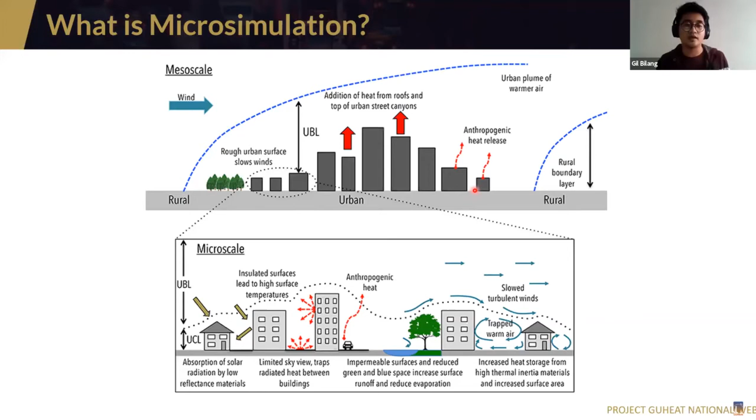Now, how do these urban features affect our urban atmospheres? For example, the materials that we use for our buildings sometimes have low albedo, meaning low reflectance materials. Instead of reflecting solar radiation, they tend to absorb it. We have insulated surfaces that lead to high surface temperatures, or we have limited sky view, which traps heat within buildings. Another is anthropogenic heat sources from our cars, impermeable surfaces from the roads, and also how we place buildings together.

It affects the wind, because wind actually helps in convecting or dispersing warm air, but because of the placement of our buildings or structures, sometimes it causes turbulent winds or it traps warm air. The thing with turbulent wind is that if the area has turbulent wind, it tends to also have a higher air temperature. Now, given this microscale, we try to model all of this together to come up with a near accurate real life scenario.

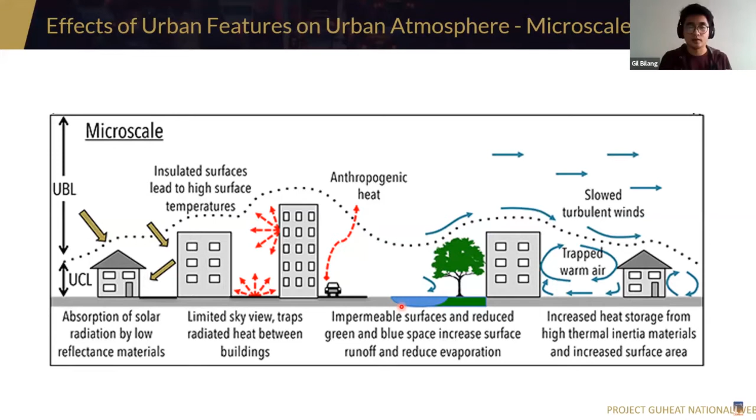So here comes the model that we use, ENVI-met. ENVI-met is a microclimate simulation software which we use to simulate the urban environment. It can also assist environmental planning, like creating new towns or simulating new buildings or new construction materials. It also creates microclimate simulations so that we can plan out resilient cities, in the context of our project, without urban heat islands. The simulation we will be presenting today mostly covers the use of ENVI-met.

Moving forward, here is our simulation scenario with our sites. First is the Davao City Hall complex, wherein we determine whether green roofs cool our air temperature. Second, we analyze the effects in terms of air temperature of proposed scenarios such as the construction of a new condotel or the new skyway in Claveria Street.

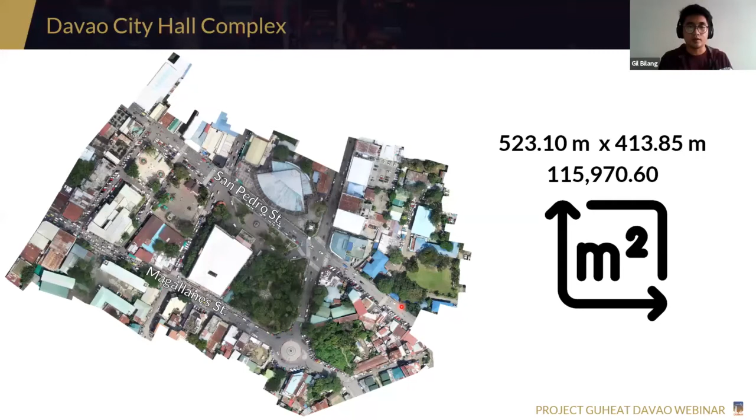So for our first study, this is the Davao City Hall complex. It is around 115,970 square meters, and it has two main thoroughfares, San Pedro Street and Magallanes Street. For those not familiar with this setup, these are the landmarks that we have: the City Hall, Sangguniang Panlungsod, the Cathedral, the Rotunda, and such. This is the real photo, and this is the ENVI-met model, how we modeled it.

Now, what are the scenarios that we have? We have the current scenario, followed by scenario 2, which is the current plus green roofs. The third is we add buildings on the areas where there are spaces. And the last is the buildings from scenario 3 with green roofs.

Now you may be asking, how do we qualify the green roof part? We conducted a survey, and our criteria for placing the green roofs are: first, it should be concrete; second, it should be a flat surface instead of slanted; and third, those two qualifications. So this is the spatial distribution of our air temperature.

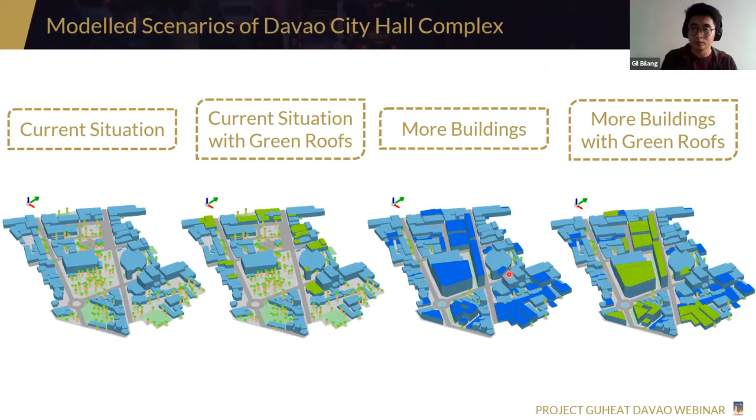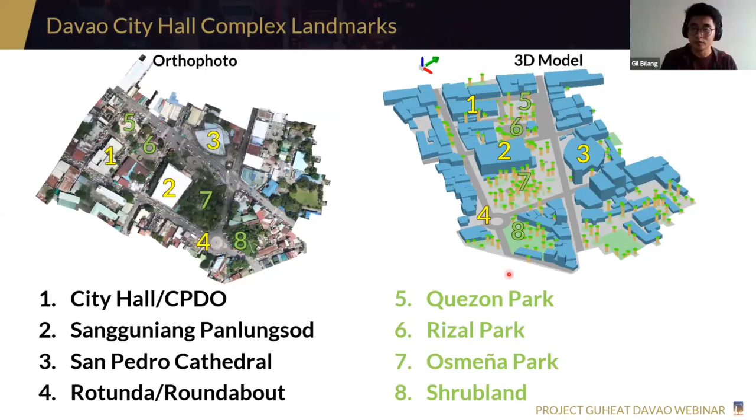We chose 9 a.m. in the morning, 1 p.m. after noon, and mid-afternoon. This figure shows an air temperature simulation taken at 2 meters, and generally the air temperature ranges from 20 to 41 degrees Celsius. As you can see, the hottest part is around 1 p.m. Now we will look at it scenario by scenario, comparing with the current scenario.

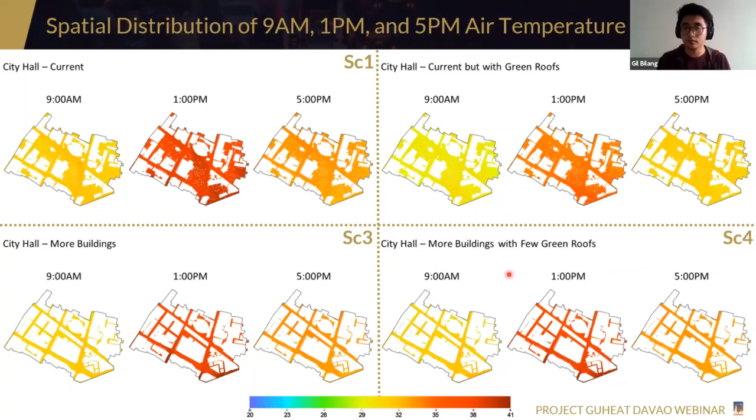This is scenario 1 and scenario 2. We notice a higher temperature for both scenarios at 1 p.m. But in comparison to scenario 1, the air temperature for scenario 2, with green roofs, is lower at 1 p.m. What this tells us is that the placement of green roofs contributes to lowering air temperature. The lowering of air temperature is seen at 9 a.m., 1 p.m. and 5 p.m.

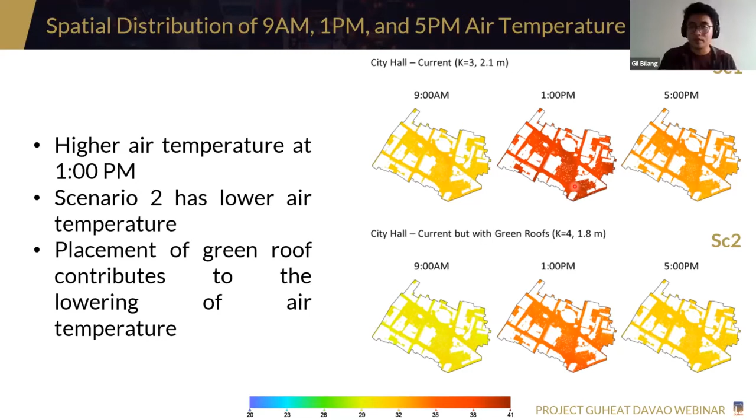In scenario 3, where we place more buildings in areas that were previously open space in scenario 1, we see a similarity of temperature, evidently on the streets. The air temperature colors are almost the same when we place more buildings in the area. Whereas, what if we put green roofs on top of the buildings we placed in scenario 3?

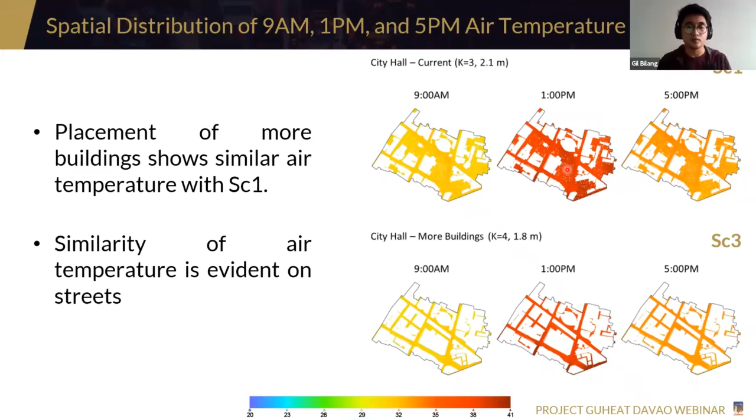We observe a slight reduction, which means that even if you put green roofs with more buildings, the air temperature is only slightly lower than scenario 1. Which means that in terms of mitigating strategies, placing more buildings contributes to warming the air temperature at near surface level, even if we put green roofs.

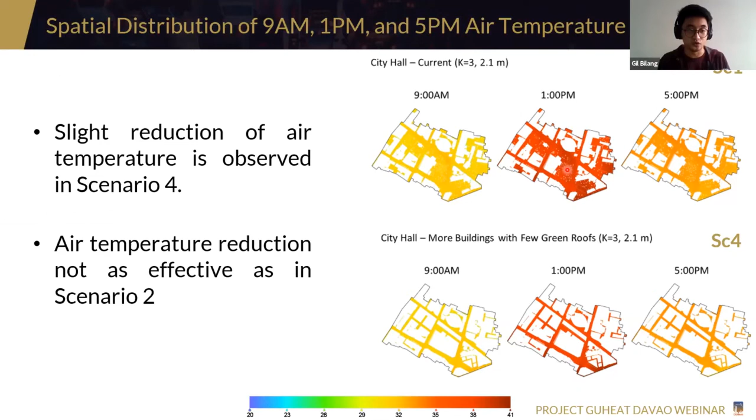Now this is a figure of the evolution of hotspots, and we focus on around 1 p.m. because this is the time when the hotspots are largest in terms of area. Looking at these hotspots, we see them developing in certain places, but with some similarity. So we will try to look at them one by one.

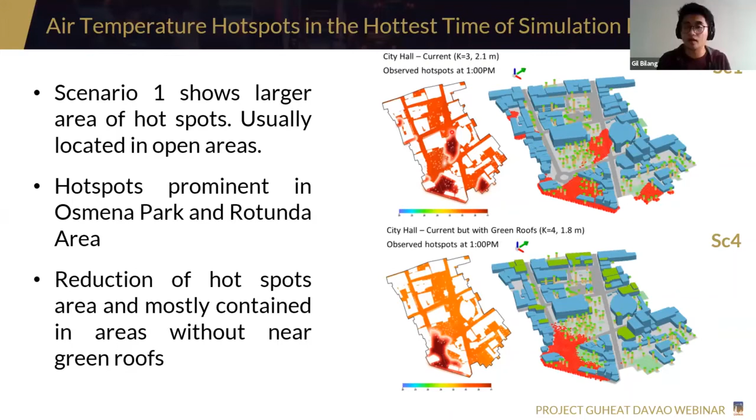Going back now, this is the evolution of the hotspot air temperature at the hottest time, around 1 p.m. As you can see, we have the current scenario, the current with green roofs, more buildings in scenario 3, and more buildings with green roofs. Again, we see a reduction of our hotspots from scenario to scenario. The difference is that for scenario 2, the reduction is because of the addition of green roofs, while in scenario 3, the reduction is because we placed buildings.

Now, it's kind of impossible for the hotspot area to occupy the same area as in the current situation because buildings are already placed. But one thing that is similar is that we still see the same hotspots in the Rotunda area. And when we go to scenario 4, with more buildings but few green roofs, we still observe the same hotspot areas.

Now, you might be thinking, what's the difference between scenarios 3 and 4 in comparison to scenario 1? Looking at the color gradient on the left side of the figures, compared to scenario 1, the air temperature on the streets is a little bit cooler. But we can see a more evident cooler air temperature for scenario 2 in comparison to scenario 1. Next slide, please.

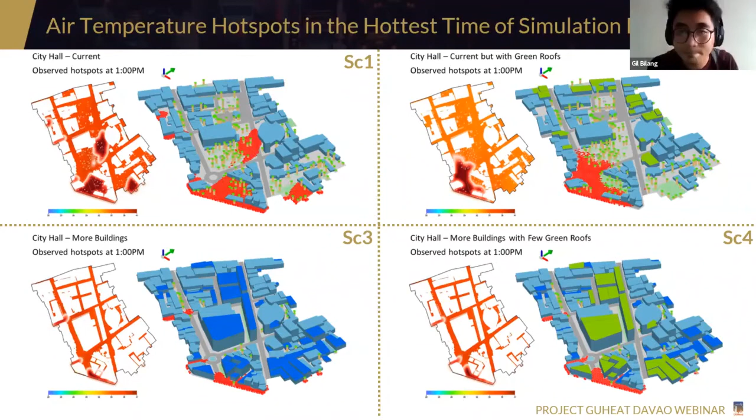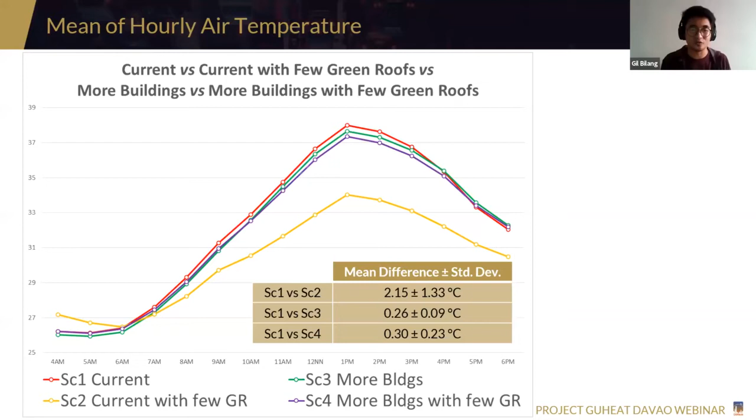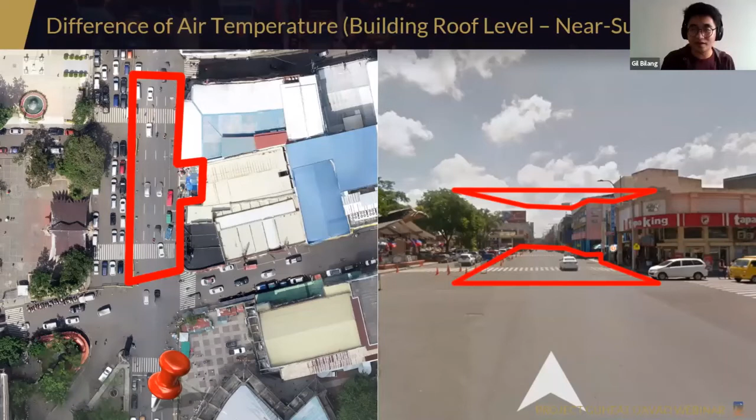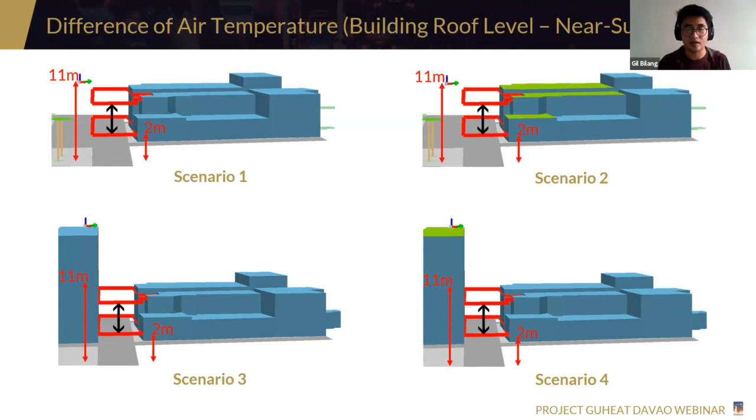So in this study, we try to determine the impact of vegetation and also the building shading. So as you can see here, we take temperature at 2 meters and at 11 meters. All right, moving, please, next slide.

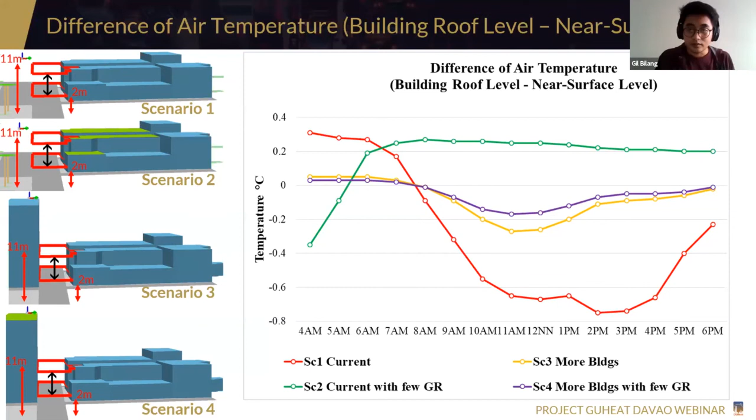Now, what does this actually imply? This implies that it's true that there is a lowering of air temperature in near surface level when we place green roofs at building roof level, but the catch here is it depends actually on the height. The taller your building is, or if you have a skyrise building, even if you place green roofs on top of it, konti lang yung kanyang epekto pagdating sa 2 meters level in comparison to buildings that are, let's say, 1-story or 2-story. So again, this is not a generalization, but this is what we found out sa study na to, and this can still be replicated. All right, next. I'll proceed further.

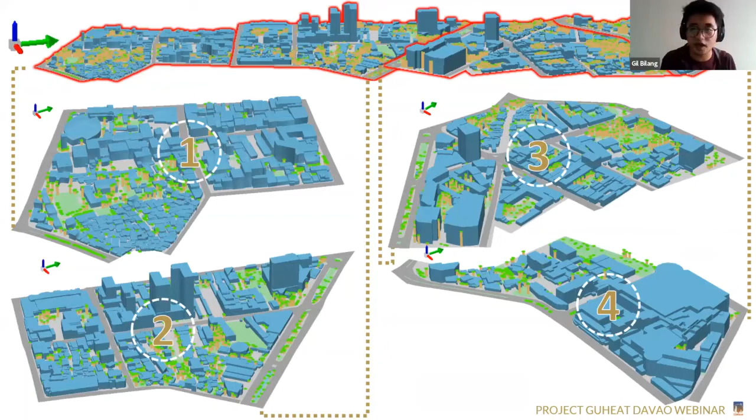Okay, so the next scenario we have is in Claveria Street or the CM Recto. It's around 631,308.55 square meters. And this is actually a thoroughfare that experiences heavy traffic due to private and public utility vehicles. There are few trees but with partially covered walkway. So in this area, kasi sa ENVI-met, to simulate this big area would be computationally heavy. So that's why we divided it into sub areas. So we have sub area 1, 2, 3, and 4 as seen in this figure.

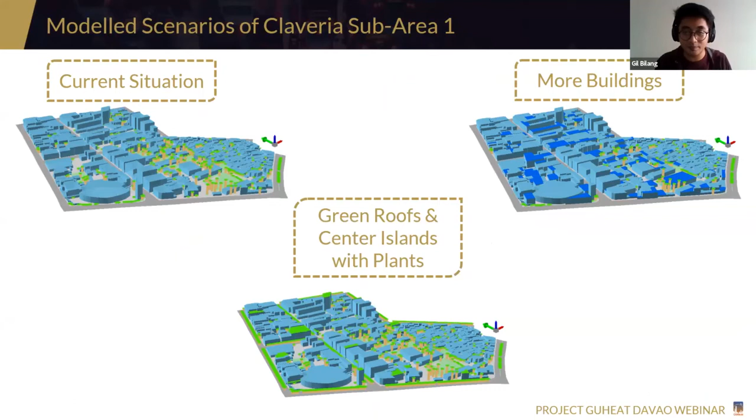Moving forward. All right, so next slide, please. So these are the model scenarios for the entire sub-area. So we have 3 scenarios. First is the current situation. Second is more buildings. We place the buildings in areas that are still open. And the next is we randomly place green roofs in the sub-area, and we also place a center island. We place plants in the center island. So this is reflected in all sub-areas. So I'll make this faster. Okay, sige, please move forward. Next slide, please. All right, sige pa.

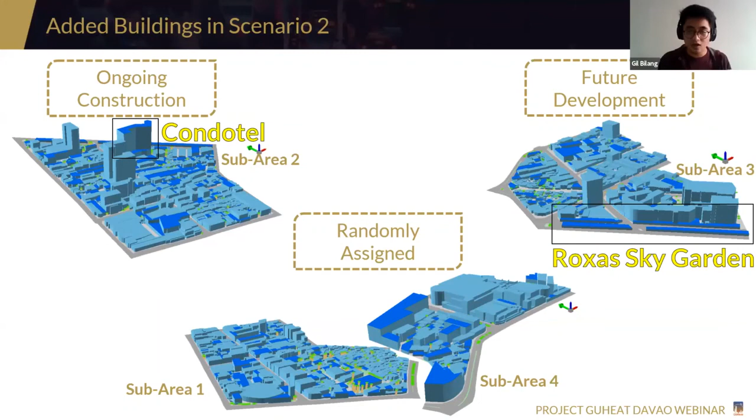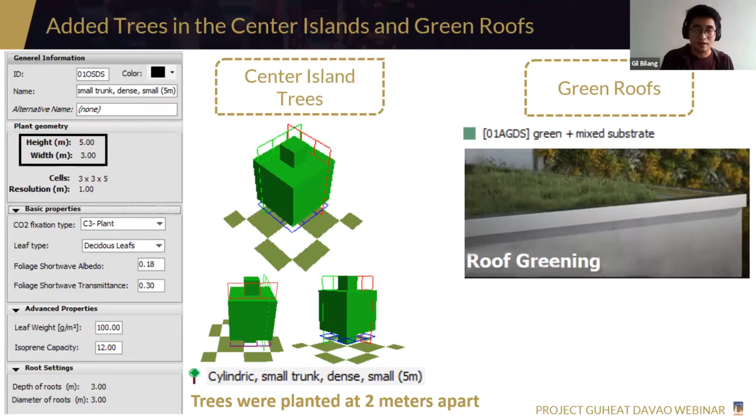All right, so dito na. So in this case, there are some ongoing construction or future developments according to the local government of Davao. In sub-area 2, we have the Condotel, while in sub-area 3, we have the Roxas Sky Garden. On the other hand, in sub-area 1 and sub-area 4, we randomly assign buildings. Okay, can we move forward? So here are some of the initializations in terms of placing trees in center islands and also the green roofs, some among grass sa green roofs natin. Okay, so sige. All right.

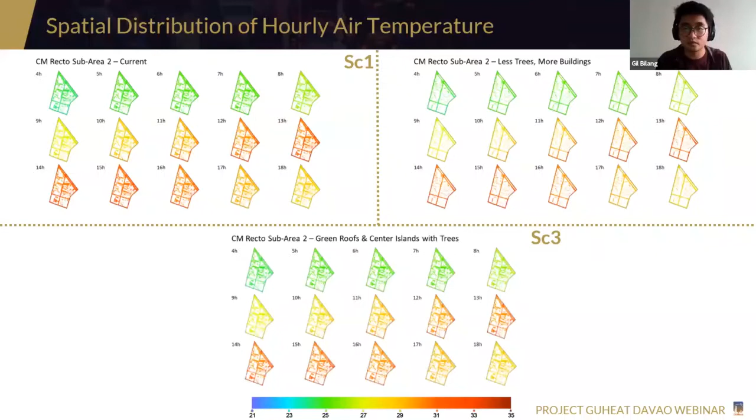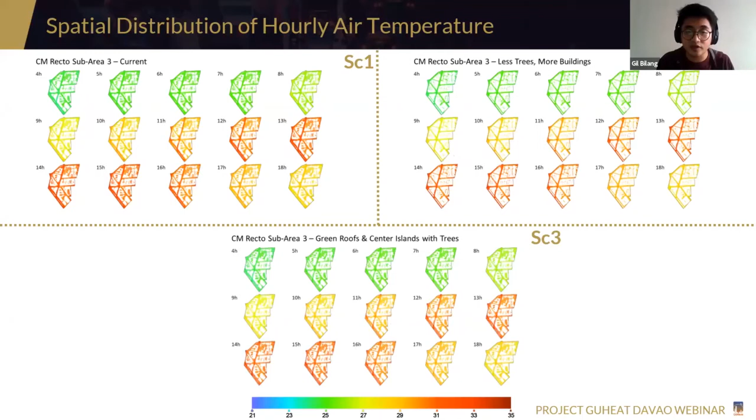All right, next slide, please. Yes, we observe the same characteristic, lower air temperature for areas with green roofs and center island. This is also for sub-area 3 and sub-area 4 for the next slide. Now, in the same way as what we have done a while ago, we try to zoom in on certain times. All right, sige, next slide. At 9 a.m., 1 p.m., and also at 5 p.m. So in this case, we see air temperatures for these time steps.

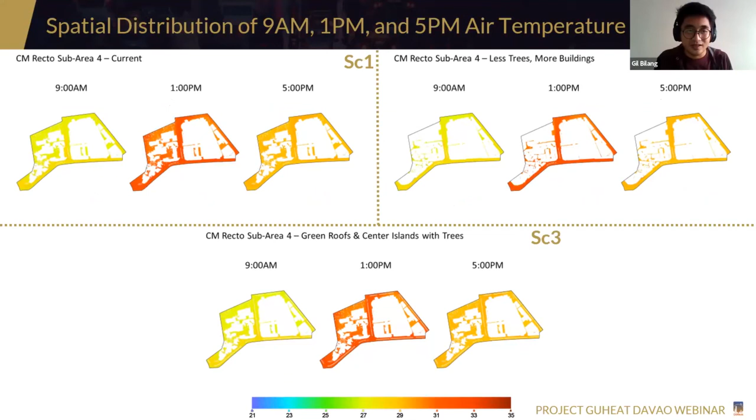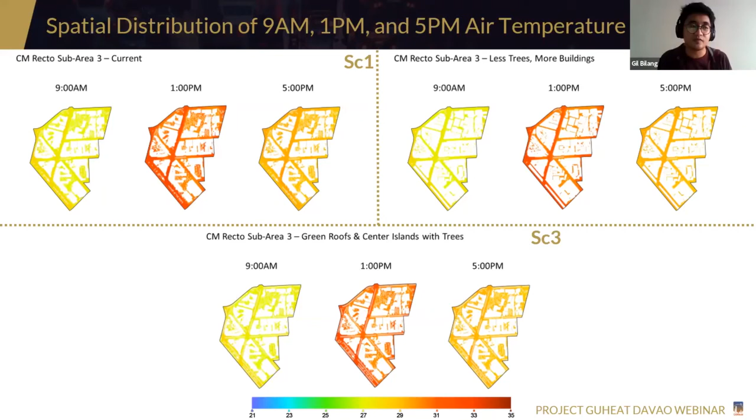Okay, so previous slide. So we can see that the air temperature in this case is lower compared to scenario 1 in sub-area 2, 3, and 4. But for sub-area 1, the opposite happens wherein the green roofs with center island with trees has higher air temperature. So again, for further recommendation that needs to be studied, we incorporate more details and field work, determining what are the actual conditions of sub-area 1.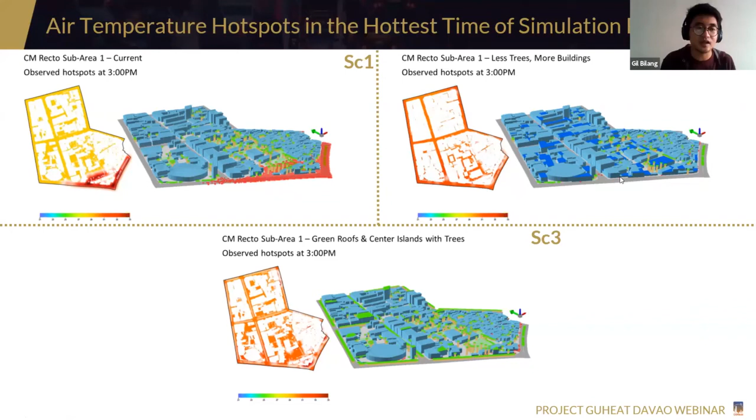As in the left figure, there is the one that I mentioned to you that is of quite interest. We see that the air temperature in scenario 3 is slightly above the temperature in sub-area 1. But then the opposite is seen for sub-area 2, 3, and 4. Move forward, please.

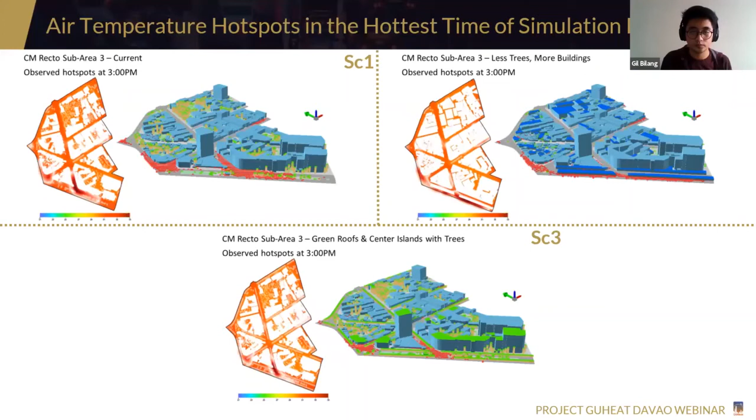Yes, for example, in this case, we see that sub-area 3, scenario 3 has lowered air temperature. Sub-area 4 has lowered air temperature as well. And sub-area 2, all right. All right, so we see that sub-area 1 is quite opposite, but for sub-area 2, 3, and 4, we see a contribution in lowering the air temperature for green roofs and center island.

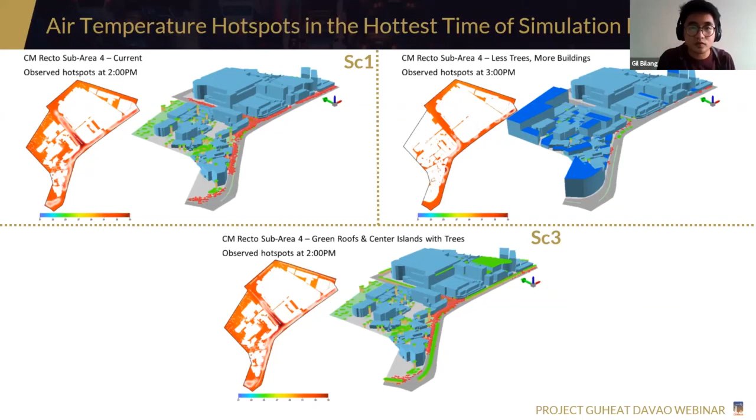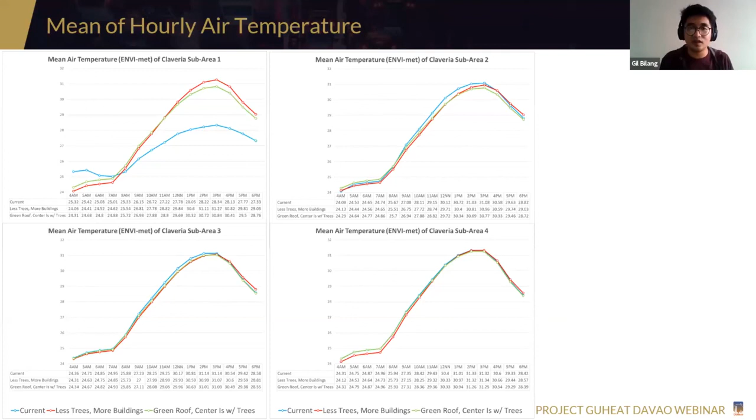Now, what we see here is that there might be low contribution of lowering air temperature when we place the greeneries. What we suggest for further recommendation is we need to do a further simulation because we only considered green roofs. So what if we consider other mitigation strategies such as vertical greening or replacing the pavements with cooler pavements and such. Doing those studies would allow us to determine if mas effective yung ganong strategies in comparison to putting trees at the center island and also the green roof.

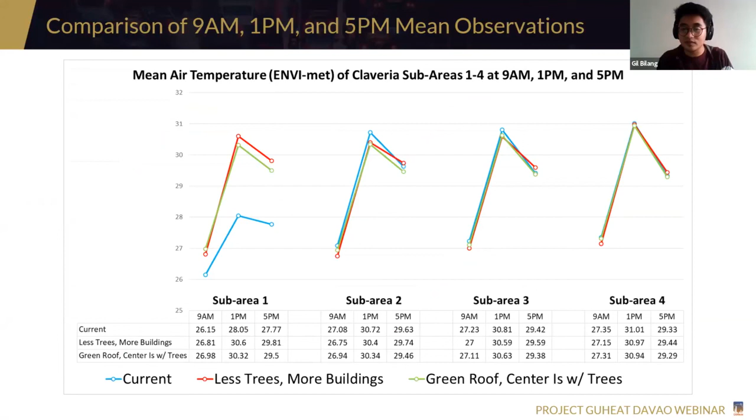Now, in summary, right? So, sige, move forward. All right. In summary, major findings from the study is that when we put green roofs, it actually depends on the height of the building. If you have a high-rise building na masyadong mataas, let's say 5-6 story buildings, placing green roofs might be of lower contribution in lowering the air temperature at 2-meter level, if that is the purpose.

But then we know that using green roofs has other purposes such as cooling capacity and decreasing energy consumption. But if the purpose is for decreasing urban temperature or near surface temperature, hindi gaano effective yung rooftop greeneries. Now, what we recommend is that we can place vertical greenings since it covers different height levels.

And lastly, our recommendation is that we try to incorporate different mitigating strategies, not only one, such as green roofs or center island trees, but also what if we change the materials, or what if we place vertical greenings, or we place cool pavements in the area. That might be of help in terms of decreasing the air temperature.